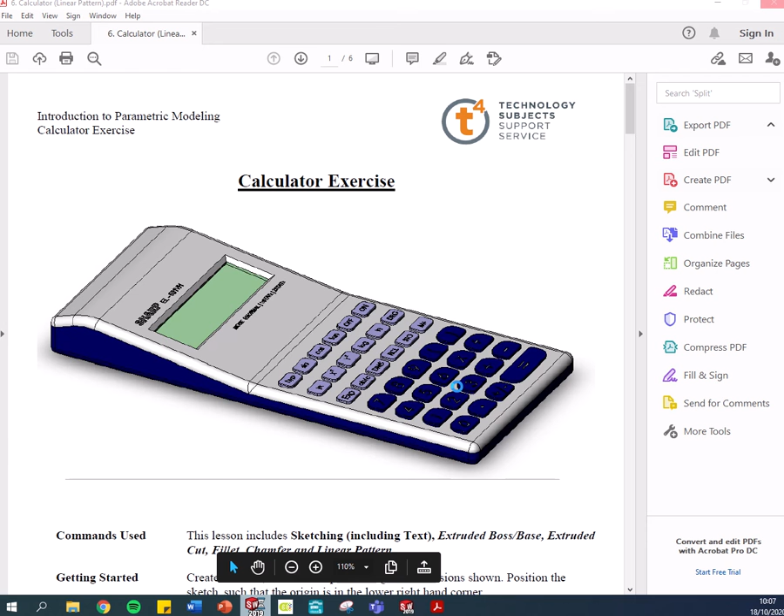Hi guys, welcome to video 8. This is the calculator activity, and the main thing we're going to learn today is how we get this pattern of buttons without having to draw them individually. It's called a linear pattern, as you can see there.

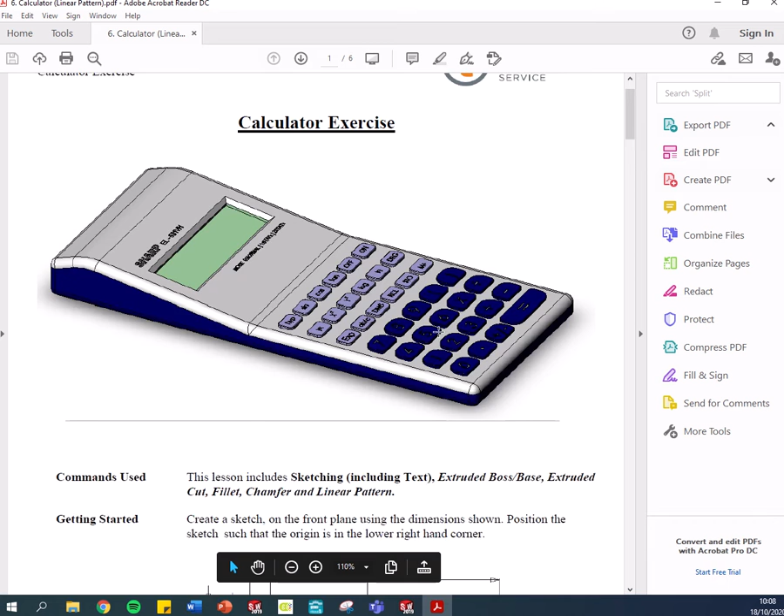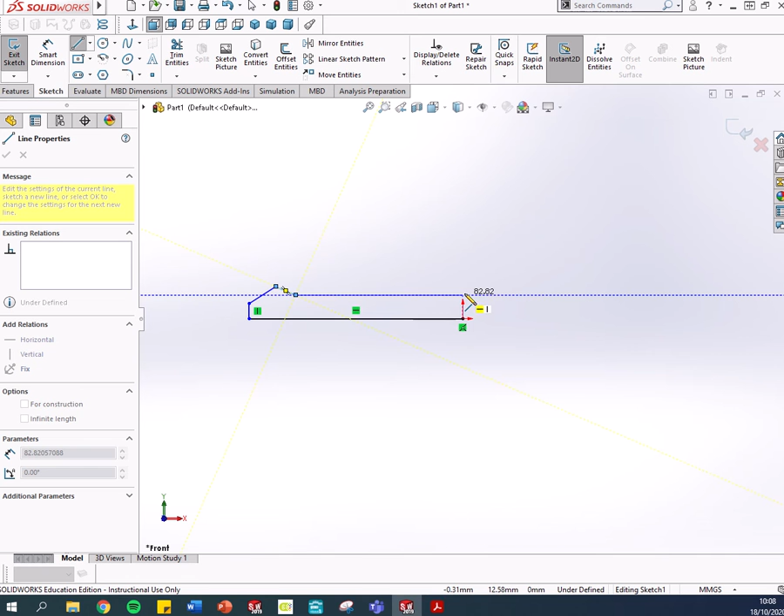Moving into SolidWorks, we're going to do a rough sketch on the front plane of the outline of the calculator. It's technically a prism in shape, with the same cross section all the way through from side to side. Sketch a line starting in the bottom right corner, which has to be the origin. Come across, up vertical, up at an angle, down at a slight angle, horizontally over, and finish off the design there.

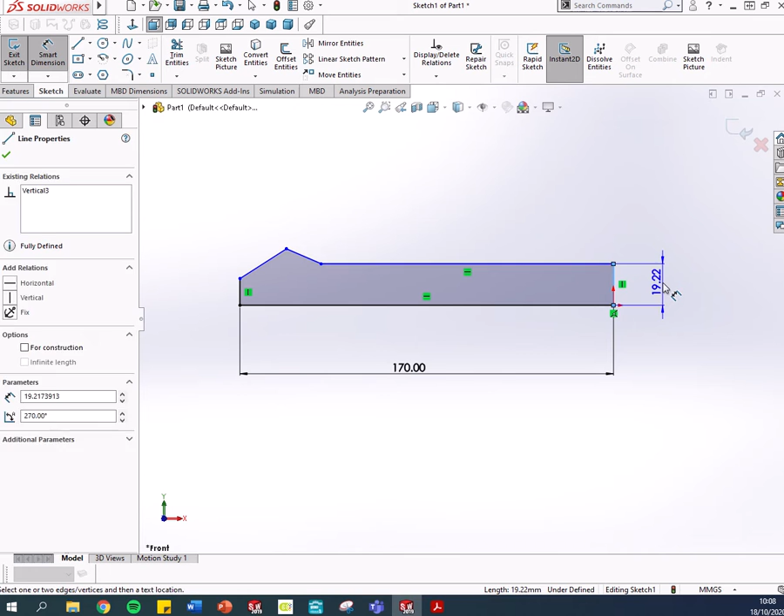Now our dimensions are 170, 9 thick, and 90 for the bed where the buttons are. Then we have 14, 14, 19. So 14 is the horizontal distance between these two points. No, 14 was the smaller one, so this one here is 19 and the one below it is 14.

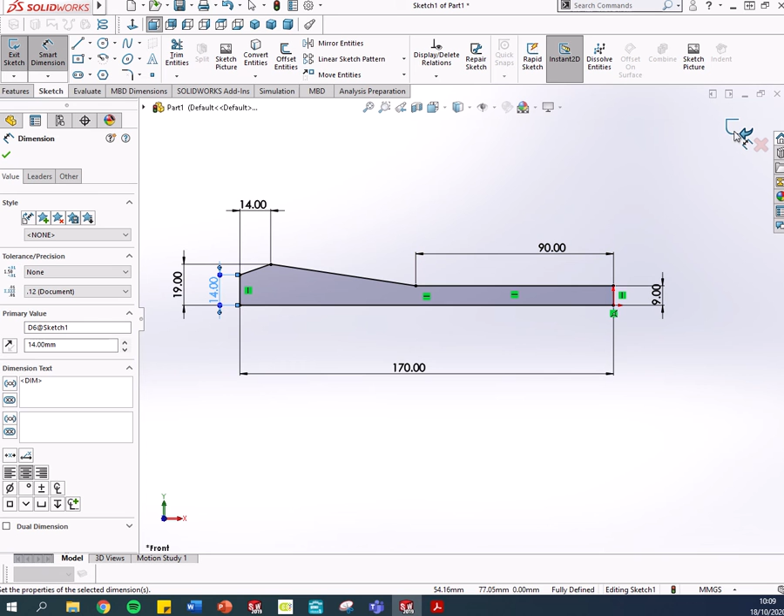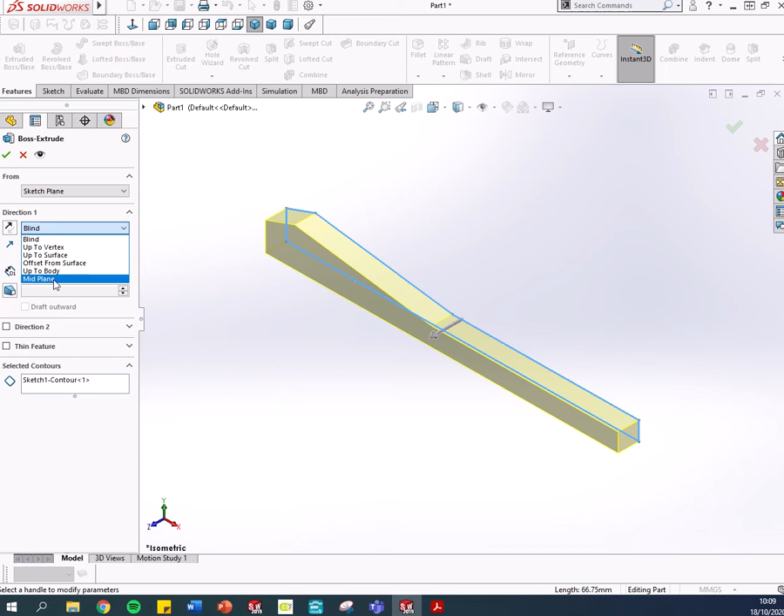The sketch is fully enclosed and fully defined, so I can go extrude boss base. Now we're bringing in a new extrude end condition called mid-plane. We can flip our normal regular blind extrude from the plane we drew the sketch on, but if we go mid-plane, it actually goes out in both directions. So the distance is 75, meaning 37.5 millimeters out one way and 37.5 out the other way. That's the body. I'm not going to start naming parts, I want to get through this video as quick as possible.

Now, as you can see from this sketch, the calculator is the wrong way around compared to how it is here. We're going to work on the screen. Remember, this is the left hand end. So we're going with a rectangle, 17, 23, 10 and 10.

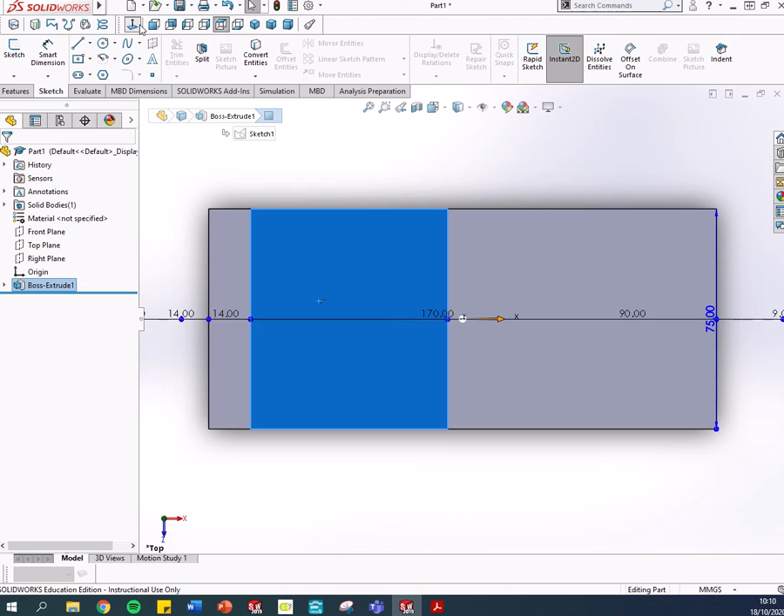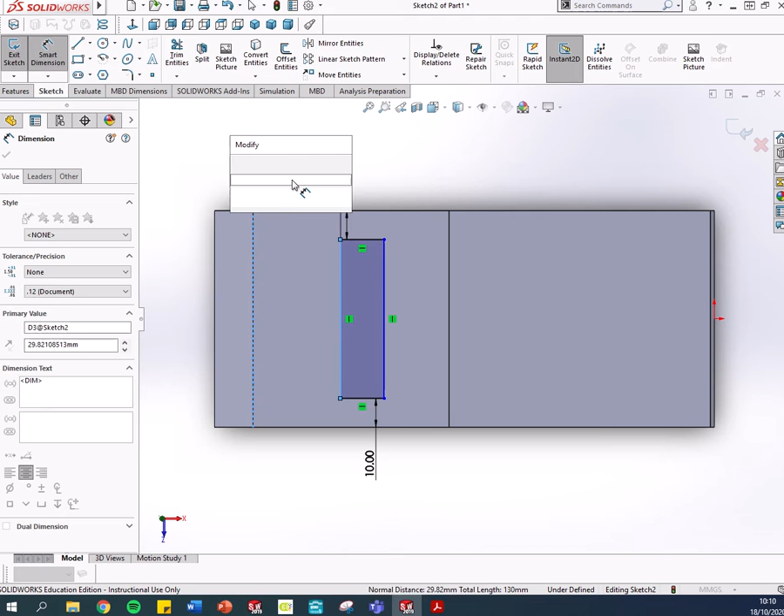I'm going to sketch on that surface, looking normal to it. Sketch a corner rectangle, and the side of the rectangle is offset 10 from the side of the calculator on both sides, and it was 23, so it's 23 to here, and that's 17. There it is, fully defined. Now I'll extrude cut that into the calculator, a depth of 2.5 mil.

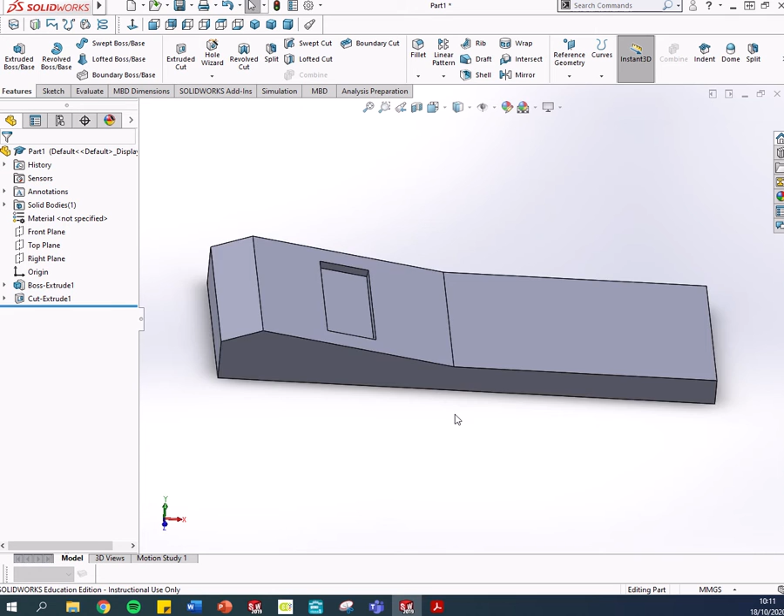Now we're going to start working on the buttons. We're just going to select the bed, look normal to it, and draw down here. So what we're going to do is an 11 by 8 rectangle, 7 to the bottom, 6 to the side, so 11, 8, and then radii. I'll probably come back to that in a second. So sketch a corner rectangle, 11, 8.

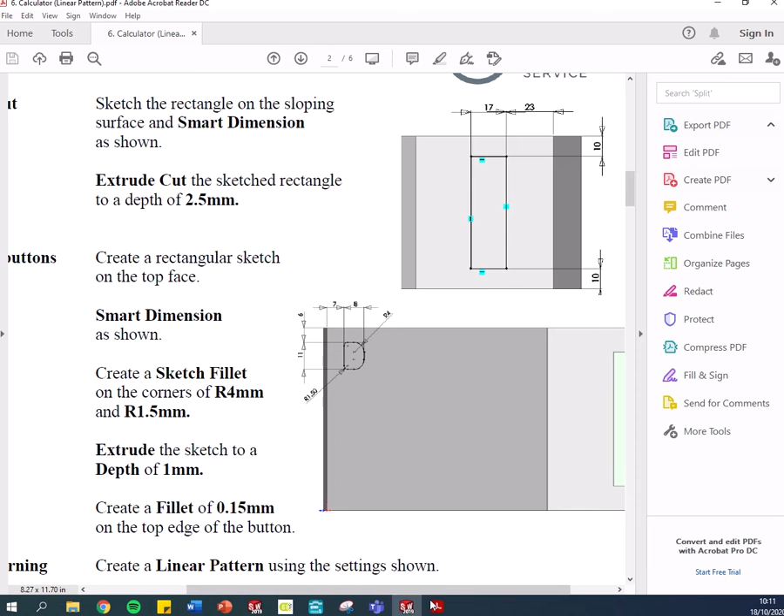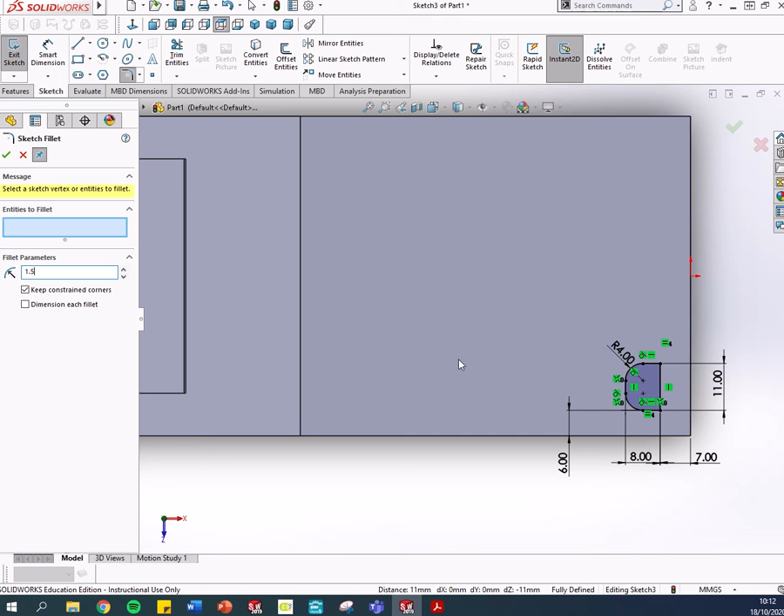I think that could be 6, I can always go back and change it. This one here we say is 7. So it's 7 to the bottom, 6 to the side, and then we put in our fillets. That has to be a radius 4 fillet, so it's a sketch fillet. Now we'll do a radius 1.5 fillet on the end of it, and that's it, done.

Now instead of having to replicate that, extrude it and duplicate it a heap of times, we can use what's called a linear pattern. It creates a pattern of features or objects in a line. So for linear pattern, we need to select two directions. We can use that line as direction 1 and that line as direction 2.

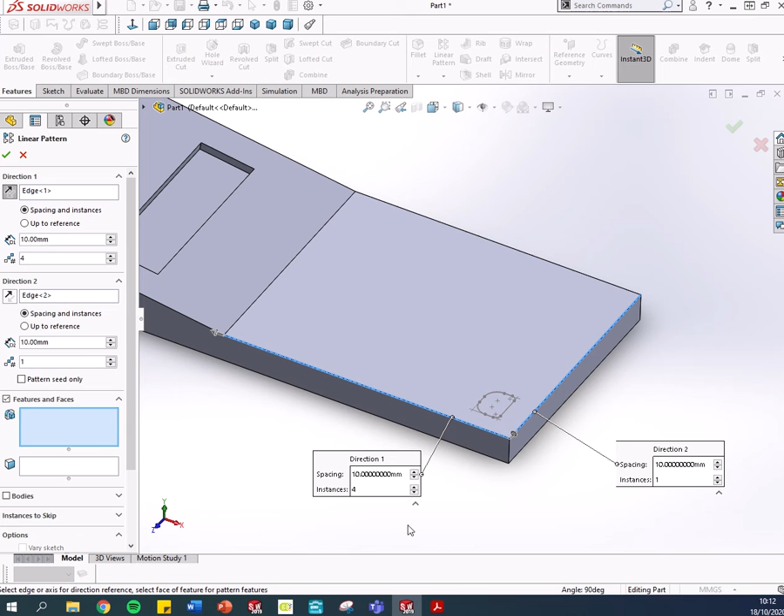Sorry, I have to extrude this to a depth of 1 millimeter first, and then a fillet of 0.15 on the top. So extrude boss base, select the sketch, and then put a fillet on the top, fillet 0.15, a very small fillet. Select the top surface, so I don't need to select all the lines and curves on the outside since they're all associated with that top surface. Now we go do our linear pattern.

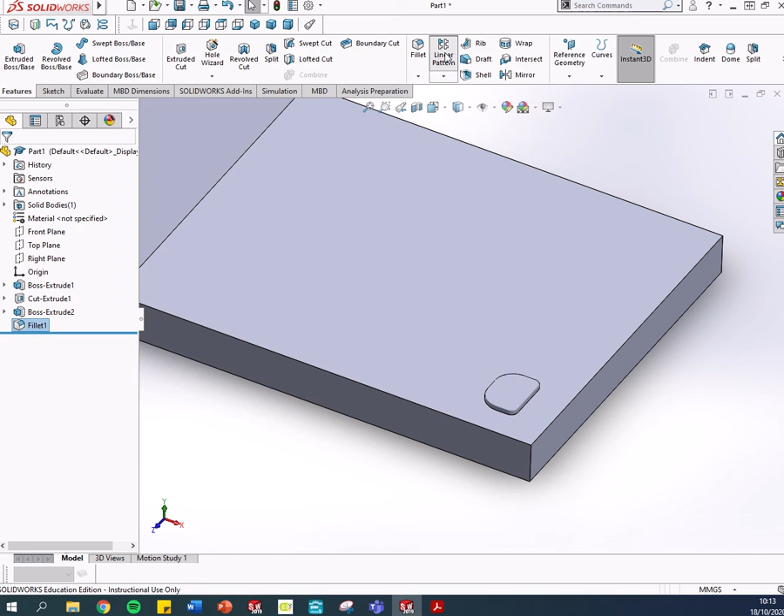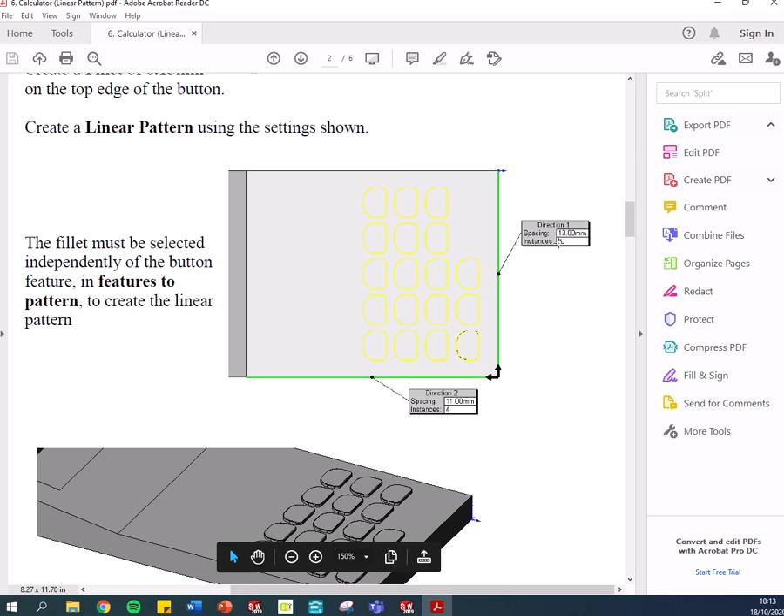Select our two directions and we'll get our data. In this direction we're doing 11 and 4, so 11 millimeters between each object and 4 of them in that direction, and then the other one is 13, a gap of 13 between each one, and 5 of them in that direction there.

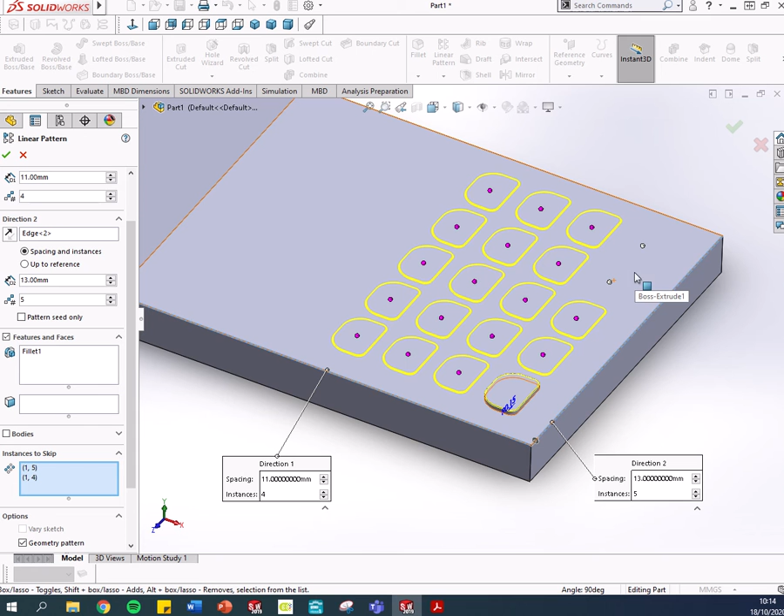Instances to skip, there's one there. Now I can take out these buttons here. So if you go to instances to skip, we can take out the two we don't need, because what we're going to have there is a nice fancy equals button. Now what I need to do here as well is not just get the fillet, since the way to fillet it, it's features and faces to actually pattern. The fillet was the only one selected, so I need to go in here and select the button as well. See the way the pattern is taking the button and the fillet on top of it, so we need to make sure we do that. Green tick.

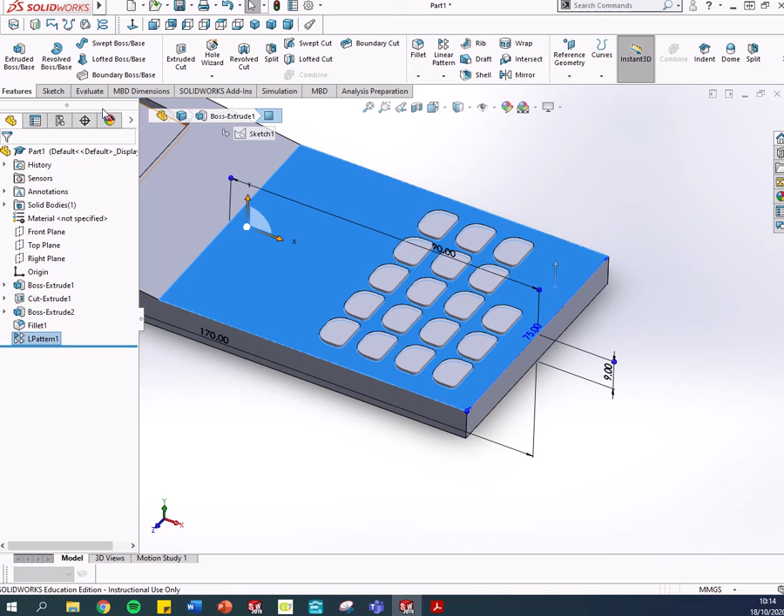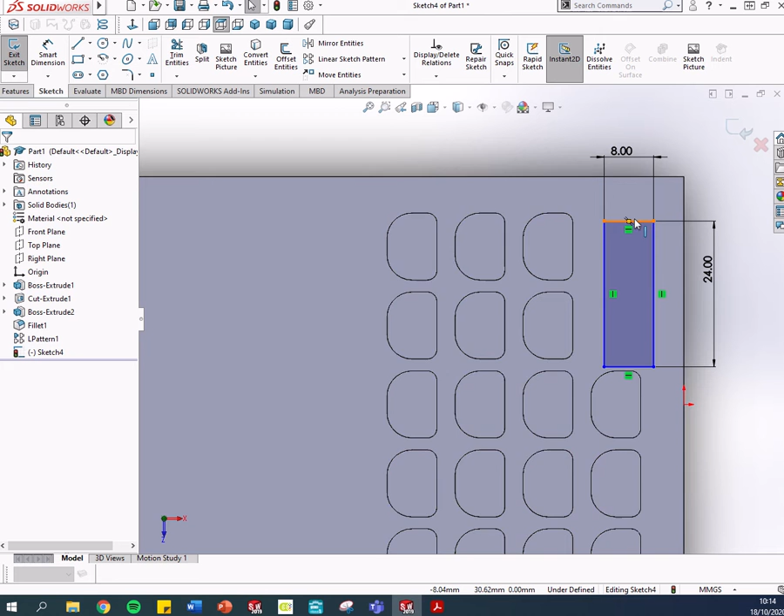Now I'll do the equals button. So once again, normal sketch, rectangle. It's a very small rectangle, but sure. And the size of it has to be, after skipping a step there, 24 by 8. That's 8, that's 24. Now what I want to do is make this edge here have a relationship with this edge here. I want them to be in line, and the same with this edge here and this edge here. We call that a collinear relationship.

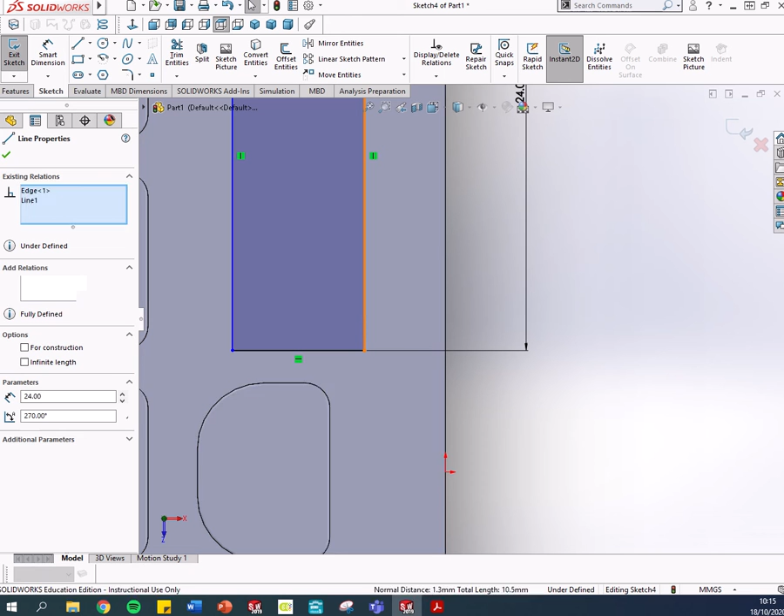Collinear means that two things are common, they're, you know, collinear, they're both in line. So I'll select that, hold control, and I need to zoom in here now and not get the edge of the fillet but the edge of the button, like so, and we make them collinear. And the same down here, that one there and the outermost edge there, collinear.

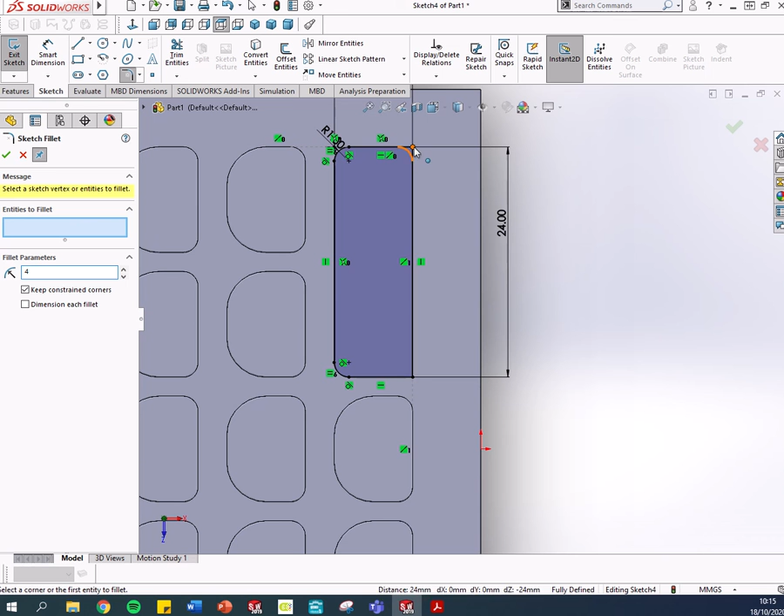And that's it. We just put our radius 4 and radius 1.5, so it's like the reverse of the buttons that we've done, where the radius 1.5 is at this end. Delete that there, there, and there, and we want to go for 4 at this end here. So rather than setting the distance between the side of the button and the edge of the calculator and the bottom, we use the collinear relationship.

So once again, features, extrude boss base, I want to go 1 millimeter, this is automatically selected, and I want to go with a fillet on top, 0.15, it's already selected from the last time. Great.

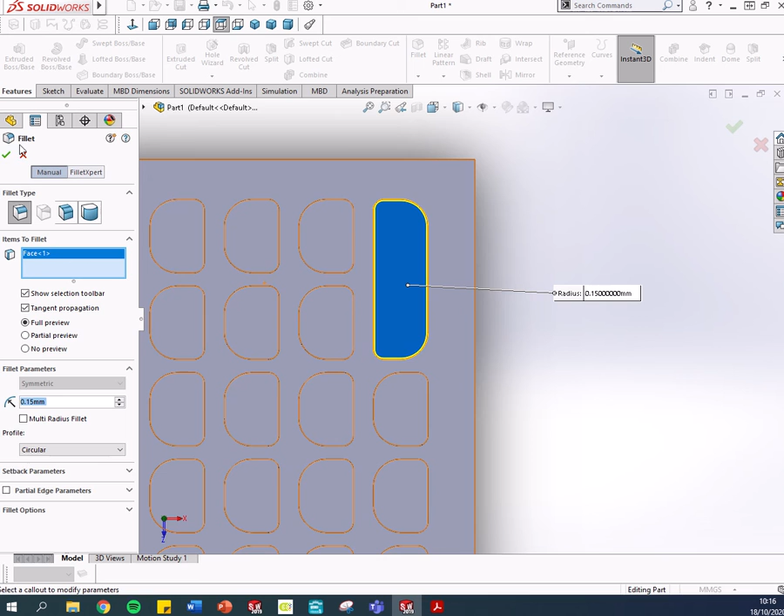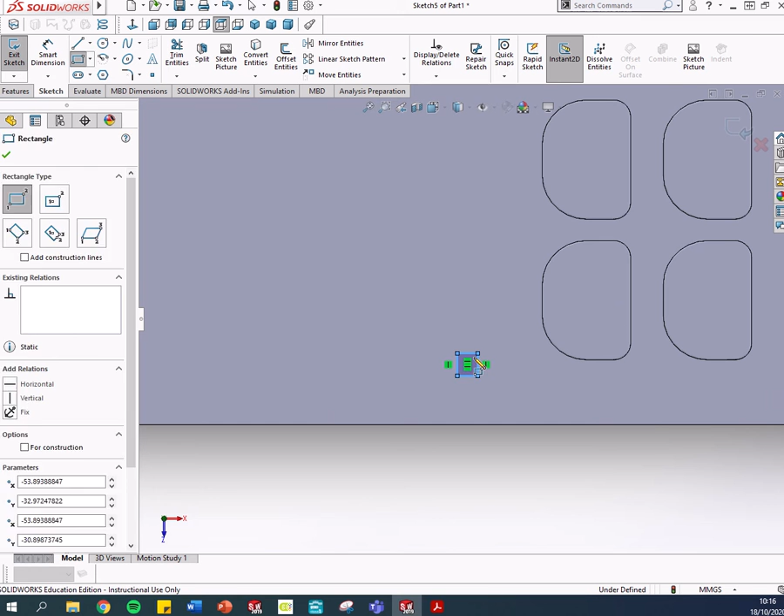Now we're just going to do the last set of buttons here, which I skipped over. So here there is a distance of 5.5 from the edge, so it's not collinear with that. Okay, so a 9 by 6 rectangle, so 6 wide, 9, and fillets, 4 and 1.5 fillets.

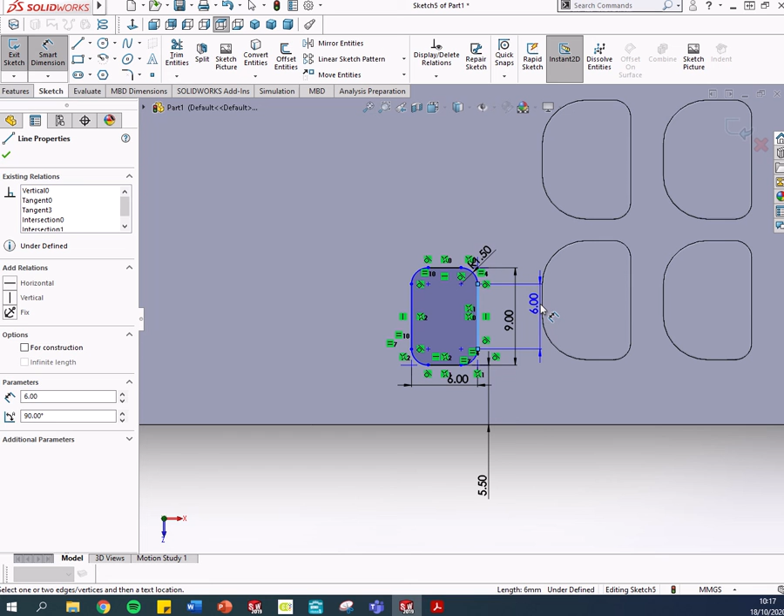So I need to set the distance from here to here to be 5.5, and a distance of 6 between the last button. And that's it, fully defined.

Okay, same again, we're going with the linear pattern. Also, just interestingly, there's also a sketch version of a linear pattern. If you had a sketch that you wanted a linear pattern, you could have done this that way as well. You could have done a sketch and then extrude them all, but sure, this is the way the guide is doing it. So linear pattern, so I have to extrude it first, obviously.

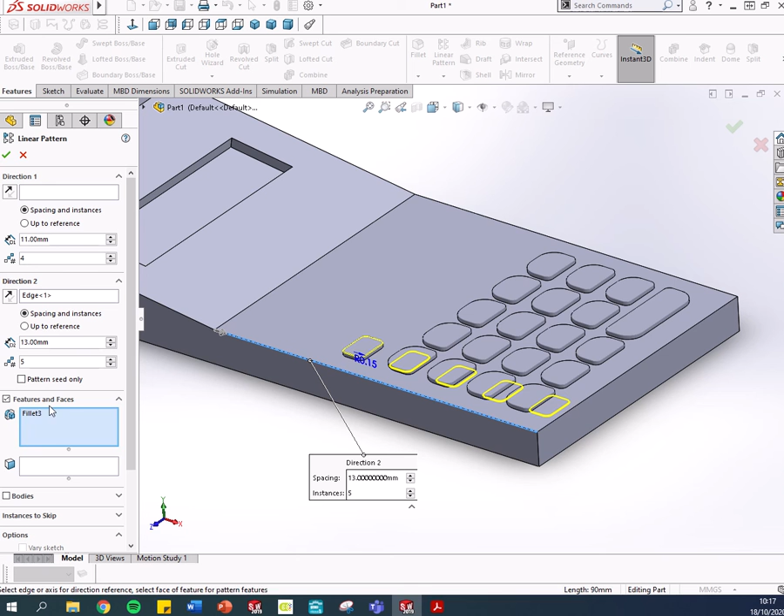For some reason it's not letting me select that. Let me just choose this one here. Hold on a second now. Try that again. I'm going to select the two of them first. I held control there, linear pattern, so the two of them are selected. Use that one there and that one there. Now, I hope this would happen the first time and it didn't, but it's working this time.

So you can see, well first of all, I'm just going to put my parameters in. So 11.5 and 3, 11 and 6. Okay, so 11.5, 3, and then 11 and 6.

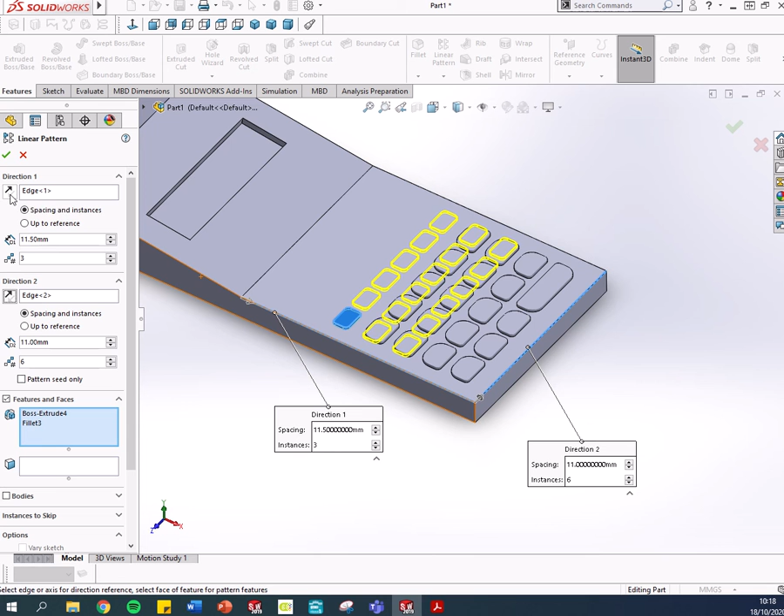Okay, so you can see what's happened here. The pattern is going in the wrong direction. So what we can do is flip the direction of our linear pattern. All I need to do is flick that one there. We're retaining all buttons, so we don't need to go to skip instances.

Now the good news is we're not going to do all the writing on it. That's a slow process you can do yourself. I'm just going to add these set of fillets in now. So a 20 millimeter fillet, I'll do the easy one first. So 20 goes here and also here.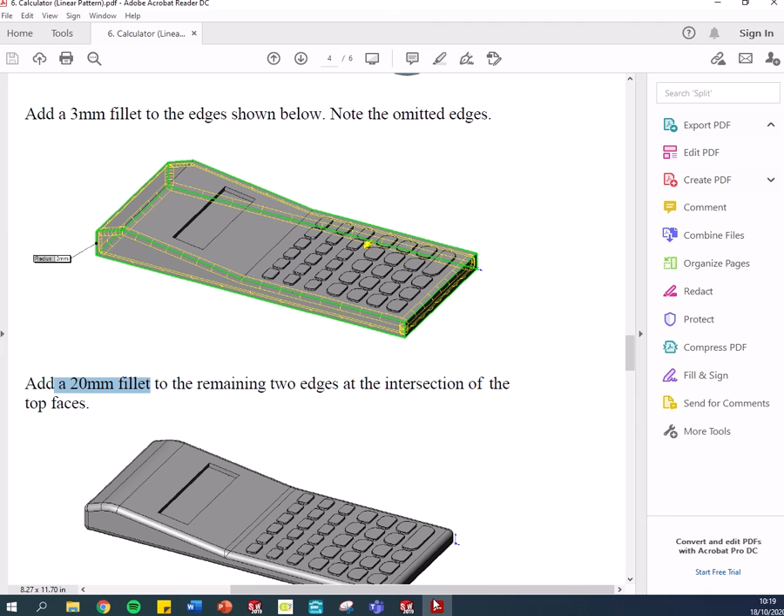And now lastly I want to do a 3 millimeter fillet all the way around the body, like so. So 3 millimeter fillet, I'm just going to select all of that face, all of that face. It saves me selecting the lines all around it. And I think that's pretty much it.

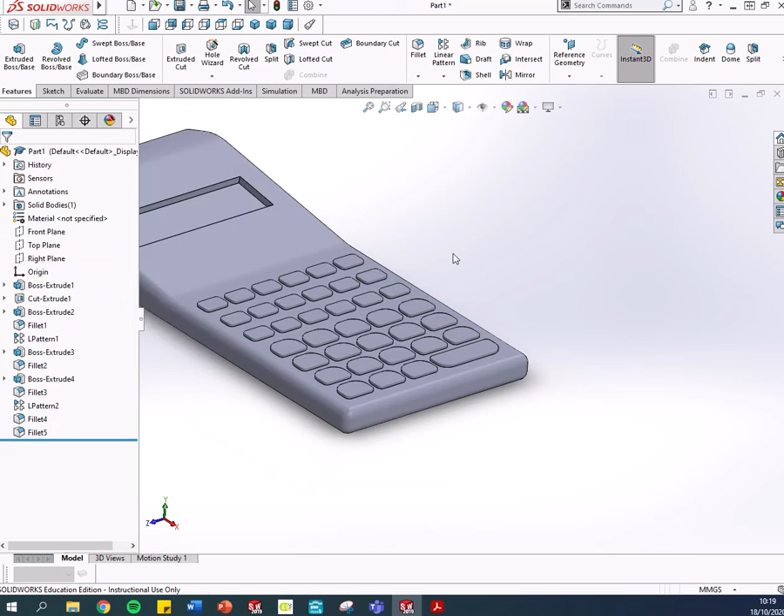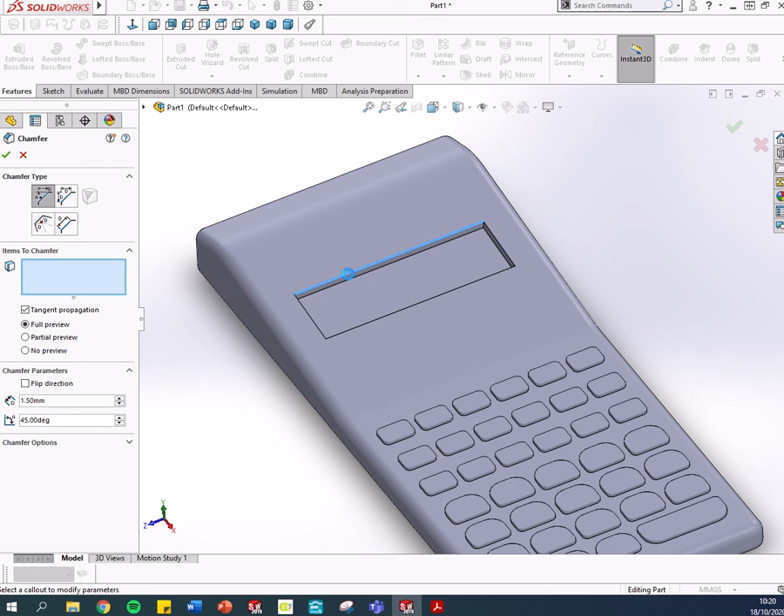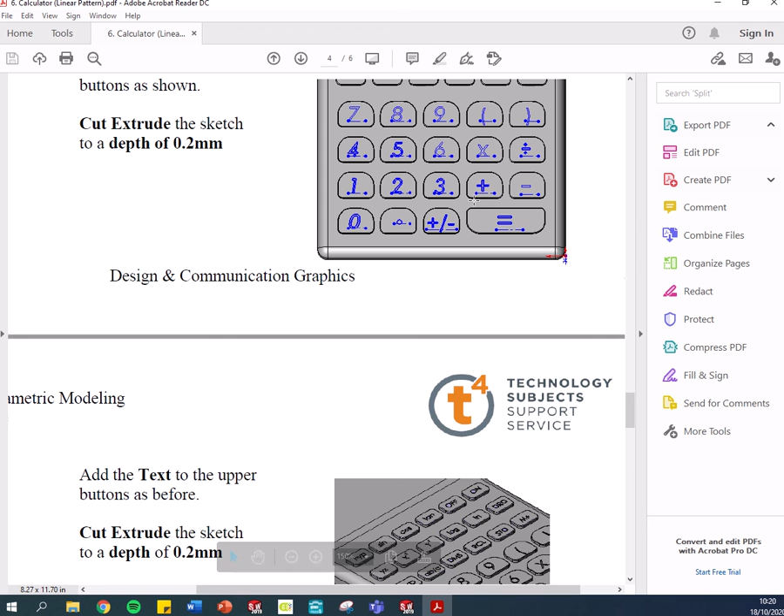Okay, if we wanted we could put some writing in. I'm not going to do the writing, it's a tedious process, there's no need to do it. That's what you should end up with, so you can do that yourself. We know how to do that already, so all you have to do is set up on each button a center line and then go around to each button and literally individually type in all the symbols yourselves. Then extrude cut them to 0.2 millimeters. I'm just going to leave it at that there. So that's the calculator button finished.